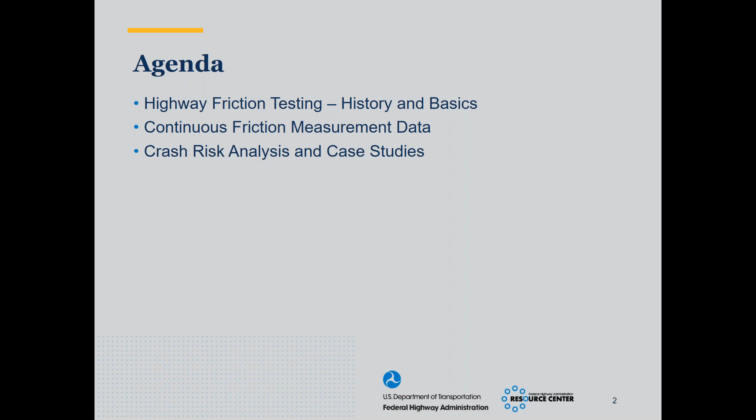So, real quickly on history: if we look at highway engineering research in the U.S., the time it was done at a major, highly coordinated level across all areas—geometric, safety, pavements—was back in the 50s and 60s. Those were the days we were preparing for the interstate era, and a lot of work was needed. Folks recognized we were creating a high-speed roadway environment we hadn't had before, and there was great concern about adequate safety on those roadways. So there was a pretty major effort in fundamental friction research back then.

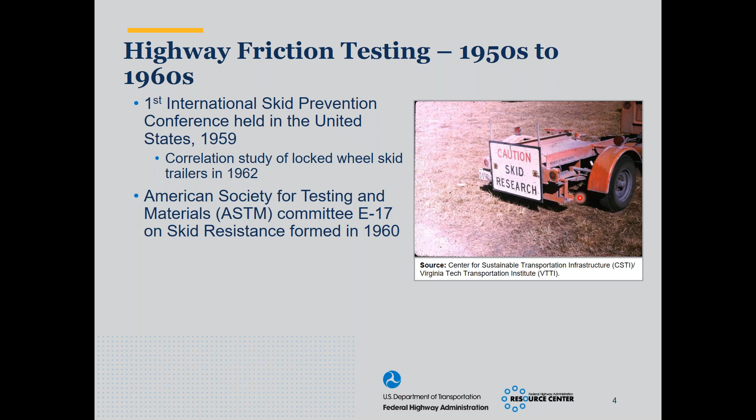The first studies were in 1959 and '62. In the photo you can see a trailer-mounted device called a locked wheel skid trailer, developed back in that time frame. Today, that remains the standard within the United States for highways.

Water is applied immediately in front of a tire, the tire is locked up and skidded, and data is collected at a standard speed of 40 miles an hour, over 59 feet. It's a really good, repeatable field test to measure friction over that 59 feet. But one thing I want to raise is: is that enough data to really inform us from a crash risk analysis standpoint?

Also, the way pavement friction was introduced to the highway community, it really focused on wet weather-related crashes—you can clearly see why folks would think wet weather crashes would be more friction related. That's how we progressed within the United States, with the locked wheel skid trailer and a focus on wet weather crashes.

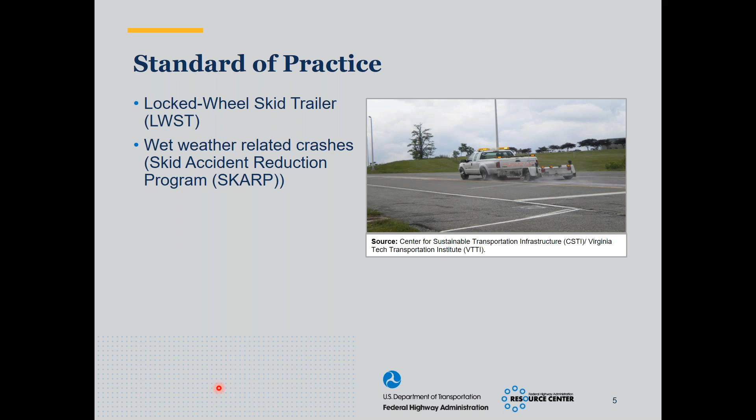So I've already presented very briefly that the locked wheel skid trailer is not a continuous measuring system. Again, if you're taking a test, you lock the wheel, measuring 59 feet at 40 miles an hour.

So for you in the safety community, for the past 10 to 15 years, those of us in the pavement community have been recognizing that pavement surface structure, below and above the surface, changes every foot you go down the road. So there's been a consistent theme within the pavement field measurement community to really understand that and try to measure the pavement condition every foot as you go down the roadway. What I've listed here are several different pavement conditions and the different technologies.

We're using ground penetrating radar, traffic speed deflectometer, which is a measure of the structural strength of the pavement, segregation, ride quality - most of you have heard the International Roughness Index. So again, we're measuring every foot of the pavement to give us an idea of the riding quality. And we're doing the same things, looking at cracking and rutting.

So what I'm presenting is really nothing different than what we've been doing in the past 15 years, just looking at, hey, let's take a look at friction and see what we can do to measure every foot of it, and then see potentially what is the value of that.

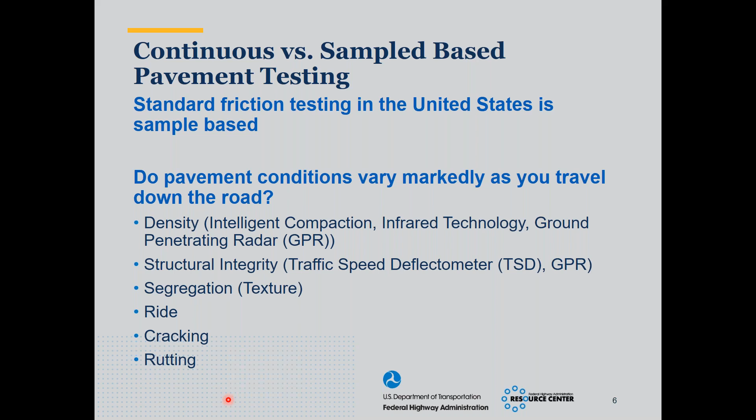So we started a federal highway pavement friction management study several years ago, and we had 4 states, of which Florida was one of them. This was really more of a demonstration project. We have a continuous friction measuring system that has been used overseas for a couple decades. It's their standard practice for highways, and we were looking at what this possibly could do for us in the U.S. But we also recognize, again, friction is not going to be the driver in many situations.

There's so many other roadway characteristics that really play into this, and you guys in safety know that better than any of us - your roadway geometrics, shoulder width, they all play. Horizontal curvature, vertical curvature, cross slope, play key roles in that. So we want to bring all that data together and just add friction to that. That's what the concept of this project was, to bring all those pieces of data together and see if we could enhance our crash risk analysis.

One thing that we've talked about are friction demand categories. What we mean by that is a recognition that every section of roadway in Florida, everywhere in the U.S., has a different friction demand. So if you think about it, if you're in a tight horizontal curve on a 2-lane, 2-way roadway, you need more friction from the pavement to keep the vehicle driving safely and under control than you would on a tangent section. So that's really what friction demand is - the recognition that different sections of roadway, the vehicle needs a different level of friction for that.

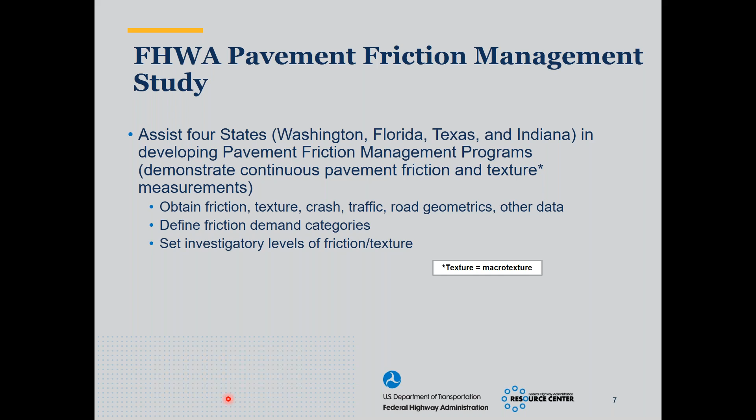And then we have this other area called macrotexture, and you'll see that it is the void between the aggregate. It does several things for us from a friction standpoint, but one of the predominant characteristics is it provides an area for the water to evacuate so that our rubber tires can come in contact with the pavement or with the aggregate and its microtexture. So it is a key element to evacuate water, and it is very key as the speeds of your roadways increase. You want to keep in mind that macrotexture is more critical for high-speed roadways - they're more sensitive to it than lower-speed roadways, because it gives that water a chance to evacuate as the tire is progressing over it.

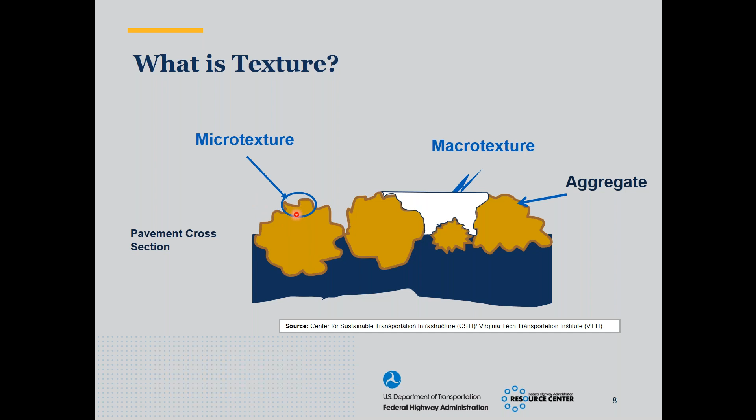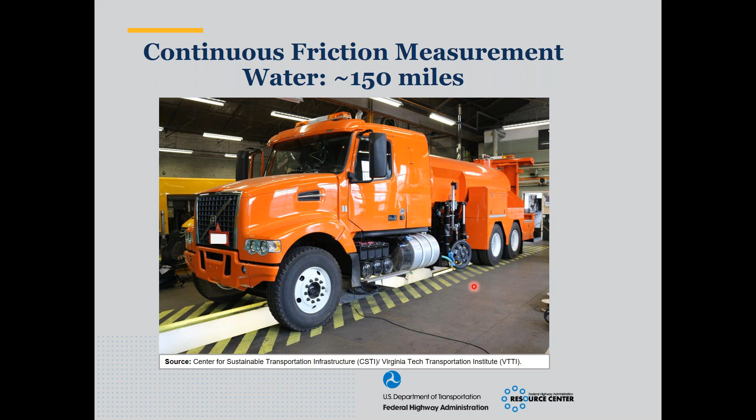There is no non-contact sensor to give us an indication of microtexture yet. But fortunately for macrotexture, the very standard models we use here in the U.S. are a laser-based non-contact sensor, and it gives us an indication of macrotexture. Again, I don't want to give anybody the impression that there is only one way of assessing macrotexture, or that this is the best way to assess macrotexture from a friction standpoint. It is just one way. We have a long ways to go to figure out what is the best, but we're getting insight into it. So those are the two ways we are assessing microtexture and macrotexture.

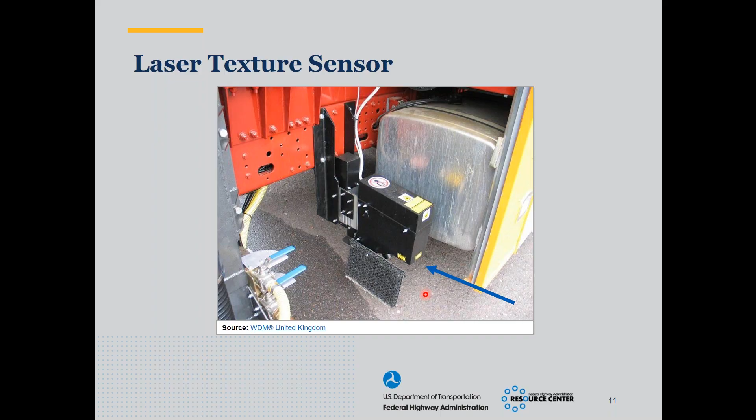Now let's look at it, folding it into crash risk analysis and also the case studies.

Since we're here talking about high friction surface treatments, I want to present information from one of the national leaders in the installation of high friction surface treatments, and that was Kentucky. They were early adopters of it, and they have some of the best data I've seen for the use of high friction surface treatments. So the data I'm showing you here is the crash percent reduction for 138 locations throughout Kentucky where they installed high friction surface treatment. That was the only treatment done out on the roads. They did not do any sign enhancement or pavement markings; it was strictly installation of high friction surface treatment. So it's a pretty good controlled, tested data set to show what a friction enhancement would do.

One thing I'd like to highlight again is Kentucky does not do network level friction testing, so none of these locations were identified by friction testing. They were identified by other more traditional crash risk pieces of data. So if we look at their crash reductions for all 138 locations, a 91% reduction in wet crashes. Kentucky is seeing great value in the use of high friction based on their site selection.

Also, one thing we like to bring forward is that high friction is good for reducing dry crashes too. So it's not just a benefit for wet crashes, we also see a benefit for dry crashes and overall crashes. The data you see here includes 3 years of crash data before installation, and the after-installation data is anywhere between 3 and 6 years, so this is a pretty good data set. As I go around the country talking with folks about high friction and continuous friction measurement, I always ask them how they

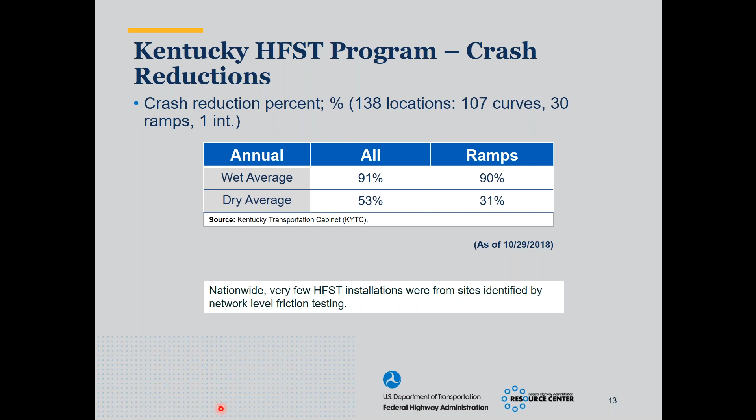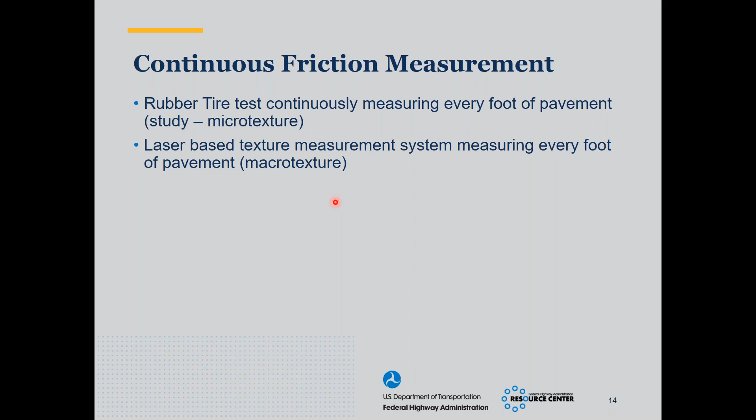I just want to reiterate that from a friction measurement assessment standpoint, we want to be assessing microtexture and macrotexture. Right now, the technology for microtexture requires a rubber tire in contact with the pavement; I'm not aware of any other method to do that. For macrotexture, luckily we have a non-contact sensor to give us an indication. So those are the two pieces we need as we're out there measuring the pavement surface.

All right, I'll go through 4 case studies. One is to show you the potential value of using continuous measurements versus the discrete measurement of the locked wheel. The next will be about macrotexture and its value. Then I'll talk about what we did in Florida last year with the road safety audit. And then I'll show you some data from a high friction surface treatment installation so you get an idea of really how much friction enhancement you get from a high friction surface treatment.

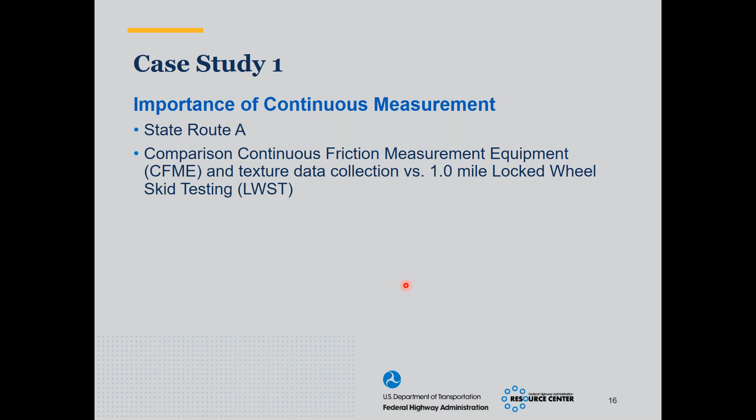Okay, so for the comparison of the continuous measurement versus the locked wheel, one of our states, we asked them to collect data every mile. So every mile point, we said lock up your locked wheel skid trailer and give us data there, and we're going to measure every foot as we go down the road.

So here's a graph that I want you to get familiar with. On the horizontal axis, we have the mile marker, so you can see we're at 54, 55, all the way up to 61. So we have several miles of data. On the left vertical axis, we have the friction test result from 0 to 100.

And the blue line here is the continuous friction measurement. You can see we are continuously measuring, and it does vary as you go down the roadway. Again, the continuous friction measurement here is an indication of microtexture.

The yellow dots are the locked wheel skid trailer, and for this state, they use a rib tire, which is the same system that Florida uses, and it is more of an indicator of microtexture than macrotexture. So let's just look at those yellow dots. You'll see that the first one is right on the 54-mile point, but then the next one is not at 55, it's up around 55.2. So there may have been something right at that mile point that didn't allow them to feel comfortable taking the test. You'll see the other yellow dots, some are actually on the mile marker and some are not. If you think about testing with a trailered system, sometimes there are locations you may not want to test from a practical standpoint, but we're able to measure continuously through all those.

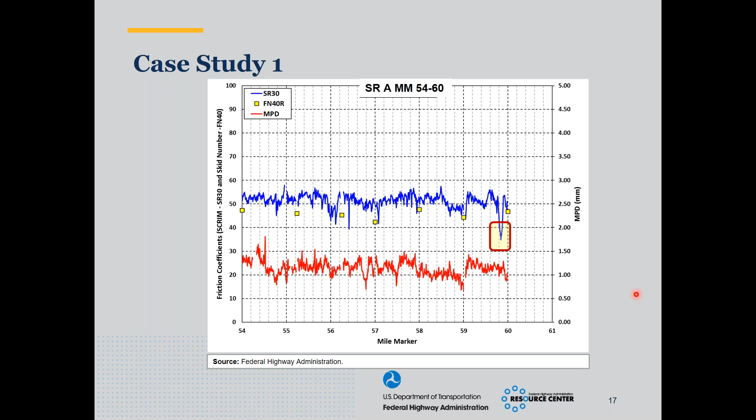All right, let's go ahead and take a look and see what's going on at 59.8. You can see the image here. There's actually a lot going on. We have a vertical curve, a horizontal curve, and an intersection. So from a crash risk standpoint, this is definitely more than what you would have on a tangent section without curvature or intersection. So you need more friction in this location because you have more activities going on. And then what does our friction data show? It shows that we have the least amount of friction in this area at this location.

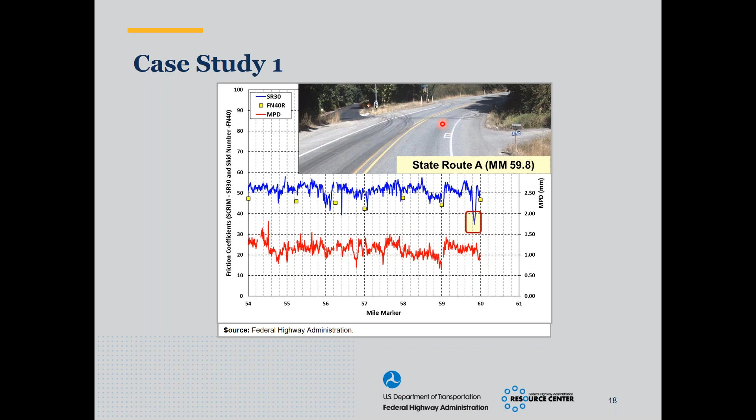From a friction demand standpoint, this is really where you need your highest friction available on your pavement surface. So from a pavement friction assessment standpoint, these locations are ones that you really want to be measuring the friction through, to get an idea if friction is a potential indicator of something going on here.

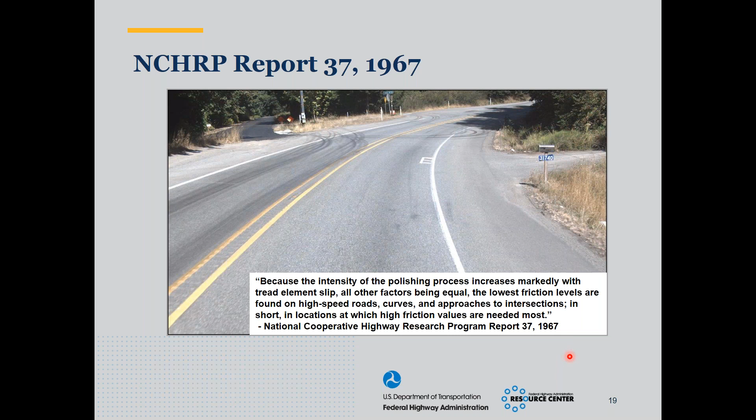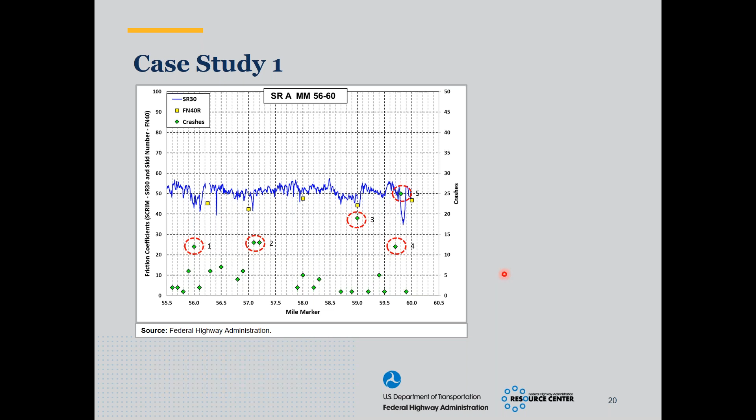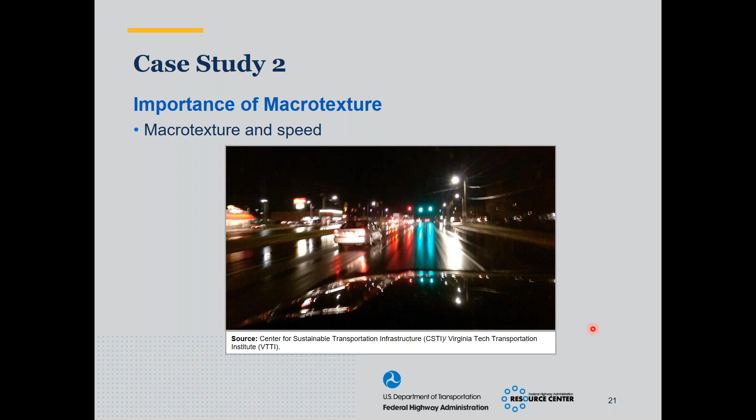Now we're going to go into macro texture and the value for it. Here we have a roadway, you can see at night the pavement looks fairly shiny, a little bit of time after the rain had occurred. So it's just a wet pavement, shiny, rain has stopped, but still the pavement is wet. That's an indication that maybe macro texture has not removed all the water. So why is it important?

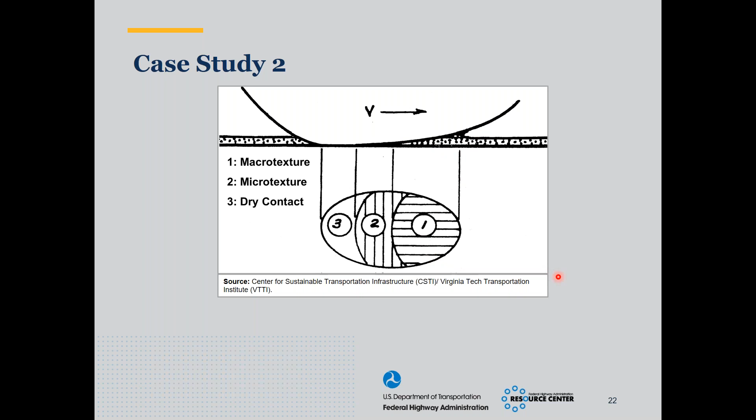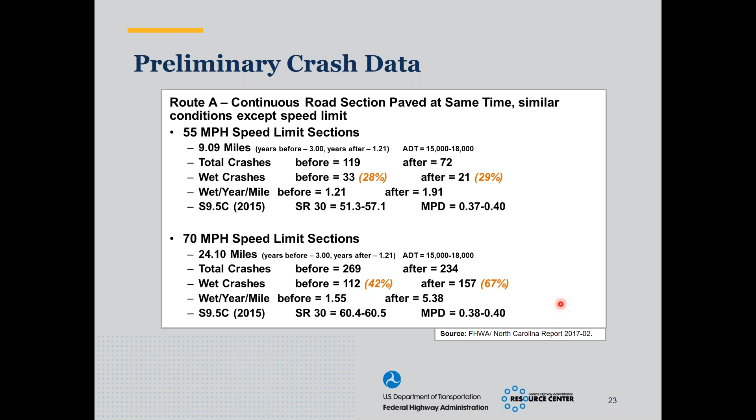So again, it's the same, if not more, from a micro texture standpoint. And if you look at your macro texture, it is essentially the same as the 55. So here's one that we believe the macro texture may be playing a role in the crash risk. Again, the higher speed macro texture is more critical from a crash risk standpoint.

Now we're going to talk about the experience we had in Florida with the conventional road safety audit. Florida has a long history of road safety audits. Tampa District has done many of them.

We did continuous friction measurement in the Federal Highway Project, so we had some continuous friction data in some of their intersections. Florida asked us to come down and include the friction measurement along with the standard road safety audit at several signalized intersections. This was the first time continuous pavement friction data was included in a road safety audit. The only additional thing incorporated was this continuous friction data I showed you, and we did several locations in the Tampa area.

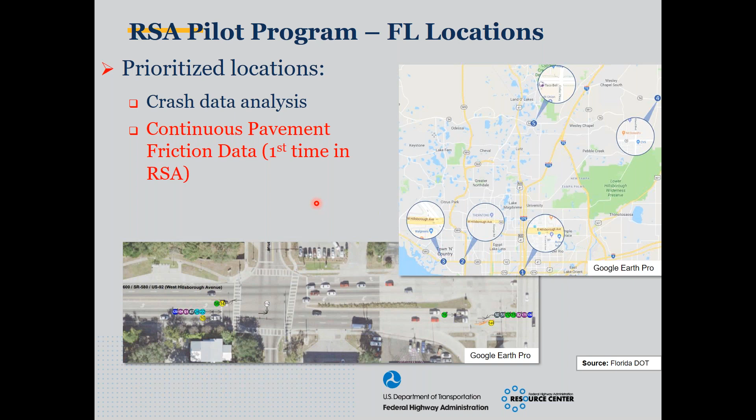All right, so let's look and see what we saw. There's a lot of information here, and this is at one location. Let's look at this top photo. You can see it's an urban area, with signalized intersections that are very close to each other.

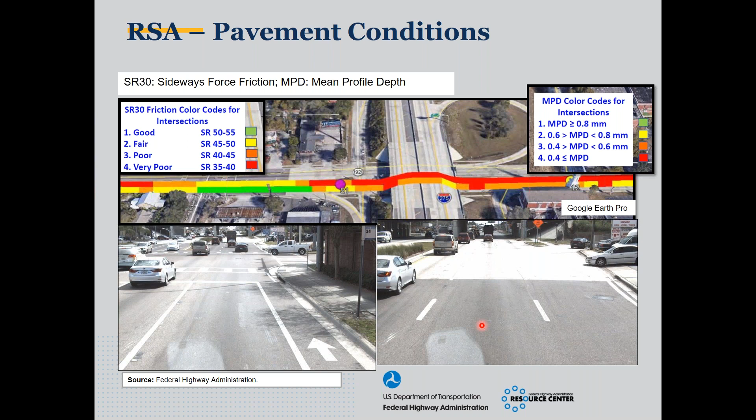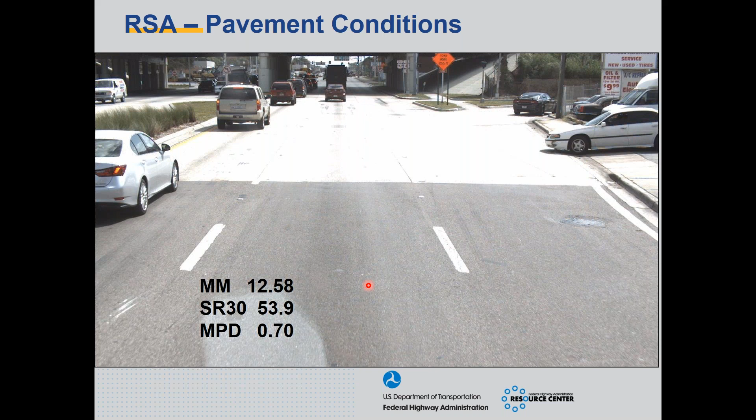Now we're just going to go down to this area here where these cars are, and you can see my pointer. Again, the same pavement surface, same construction, but here's what happens to the friction — it's now down around 54, and the macro texture is 0.7. So we believe this is a good indication of the polishing that occurs from vehicle tires at that intersection.

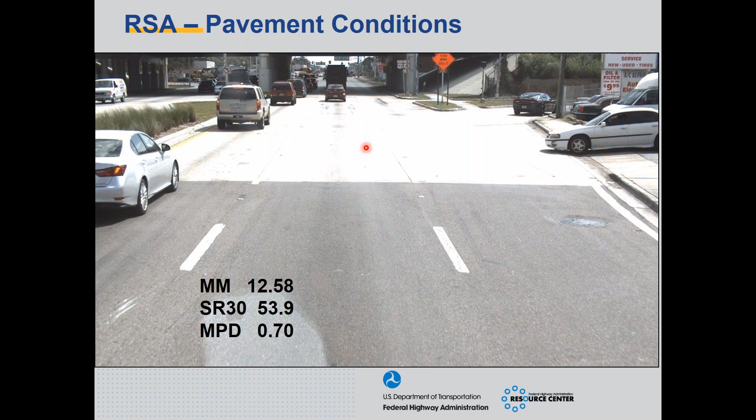Here we don't have that same action, so we have a different friction measurement. Now we're going to go to this next section of pavement, which is concrete. So this is asphalt, and now we're going onto concrete, and we'll see the friction measurement there was at 39, and the macro texture was down to 0.28. This is a good example of an intersection where tire scrubbing has created a differential friction situation as you go through the intersection.

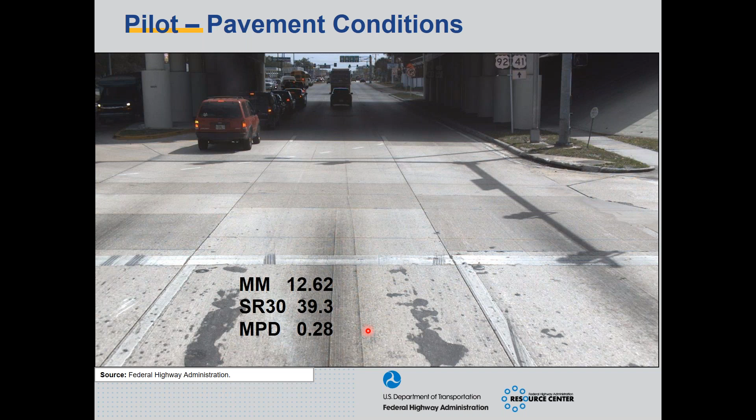For those not familiar with the road safety audit, this was the first time I was ever in one, being a pavement engineer. It was a good mix of interdisciplinary groups, including law enforcement, maintenance, safety, operations, pavements and materials. We had two independent groups so that we hopefully would be reviewing without bias. We looked at the same intersections, the same data, but as two independent groups, then came together afterwards, shared notes, and came to a conclusion.

We were out on the roadway and looked for things you really can't see from your office, in pedestrian crossings, bicycle facilities, how the signs look, whether we have enough sight distance, and what the pavement looks like. So just a very traditional road safety audit, except we added the continuous friction measurement data to the data set.

The group all came to the same recommendation that a high friction surface treatment would hopefully reduce the crashes in these locations. That was really driven by the friction data we had, and also that there were high rear end crash types at these intersections, so the folks felt enhanced friction would hopefully reduce those rear end type crashes.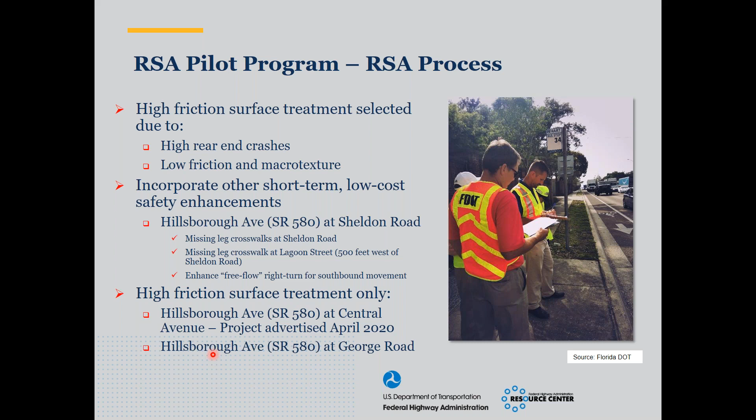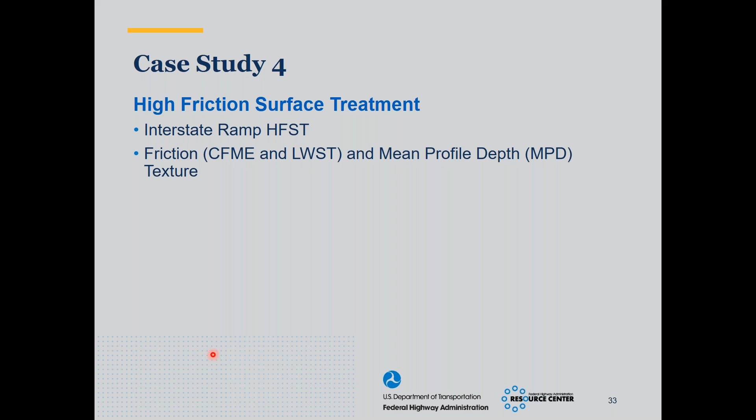Now I'm going to show you some high friction surface treatment data so you have a good idea of how all these numbers play out. You saw various numbers, now I'll show you the high friction and see how it changes.

Hopefully you're familiar with this graph. The blue is the continuous friction measurement, and as soon as we get to the high friction, it shoots from 45 up to about 100, then comes back down and stabilizes around 85. So high friction is a significant increase from a traditional pavement surface. The macro texture is all above 1 for the high friction as well. So high friction surface treatment gives you both extremely good micro texture and good macro texture, the two key characteristics we look at from a pavement engineering standpoint for friction.

The yellow dots are the lockable skid trailer, and you can see it also recognized that significant increase in friction. This gives us good data showing that high friction provides a significant increase over traditional pavement, and the continuous measurement shows you where that change happens very quickly.

One of the things we also believe the continuous measurement can tell you is where you should start and stop your high friction surface treatment installation. For example, if we look right around the 0.55 mile mark to 0.6, we dropped below 40, so maybe it would have been in the best interest to extend the high friction to 0.6. So continuous friction can give you information not only to assess whether friction may be an issue, but also, if you decide to install a friction enhancement treatment, where the limits of that treatment should go.

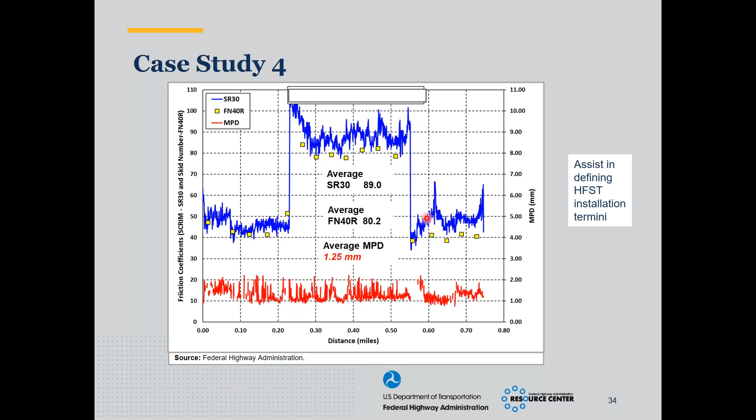Okay, so what are other countries doing? This is a standard investigatory level for friction thresholds from the United Kingdom. They use the same friction measurement system that this data is from. They've been doing it for over 20 years, and over the years they've come up with a breakdown of friction demand categories - A, B, C, Q, all different friction demand categories. For example, motorway is what we would call an interstate roadway on a tangent section. You can see that if the friction is below 0.3, 0.35, that it may be an area of concern. So it's your lowest investigatory level, but your highest speed. But because it's a tangent section, the friction demand is not that great.

Now let's go to C, which is a single carriageway non-event. That would be a two-lane, two-way roadway without an intersection, without horizontal or vertical curvature, just a tangent, two-lane, two-way roadway. You can see that their friction demand is a little bit higher, and that's because it's a two-lane roadway versus an interstate.

Now let's go down to S1, that's a bend radius of less than 500 meters on a dual carriageway. So this would be your four-lane divided highway with a curve of less than 500 meters. You can see their investigatory level for friction is up around 0.45, 0.5. So over the years they've looked at their data, looked at their crashes, and this is their investigatory level. If they have a friction measurement, they average the friction data over 10 meters, and where a friction test result over those 10 meters is less than these numbers, that will institute an investigation at that site.

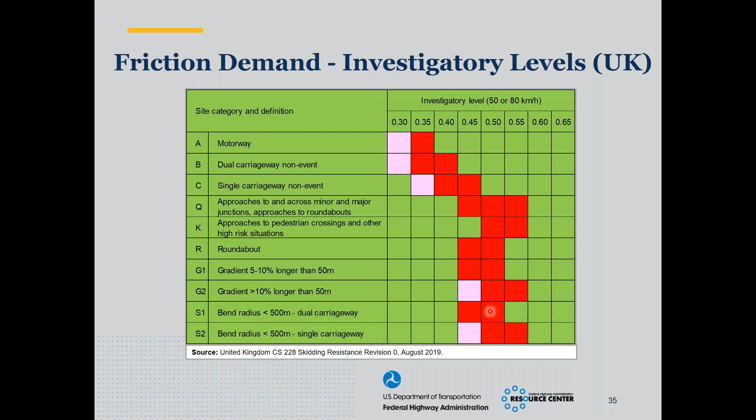Here is a traditional safety performance function that is used within the U.S. from a crash risk analysis. What we believe is that the friction data and texture data can easily be folded into this traditional crash risk analysis model, just like horizontal curvature, vertical curvature, shoulder width, lane width, and all those other roadway variables, to give you an idea of your crash risk. So we believe you can take the continuous friction data and incorporate it into your standard crash risk analysis models as they sit, which should facilitate implementation in that manner.

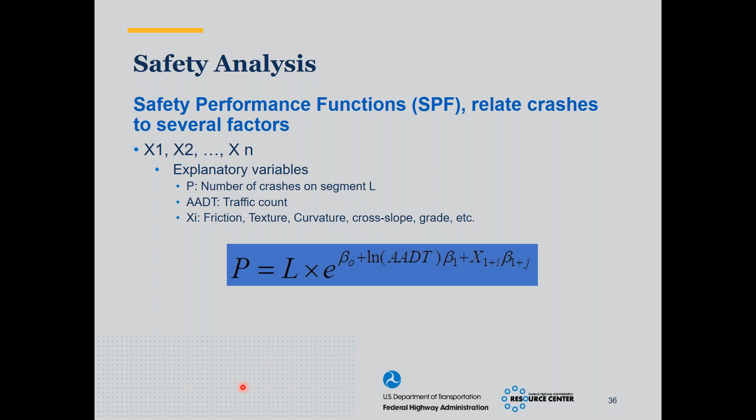So to wrap up my discussion here, back in 1967 the NCHRP Report 37 highlighted the friction demand concept, that where you have the highest friction demand, there's a good chance you have the lowest available friction on the roadway because of all that tire pavement interaction. I want to highlight that just because you have low friction data is not an automatic reason to invest in a treatment. It's just one piece of the puzzle, and it's a very complex puzzle.

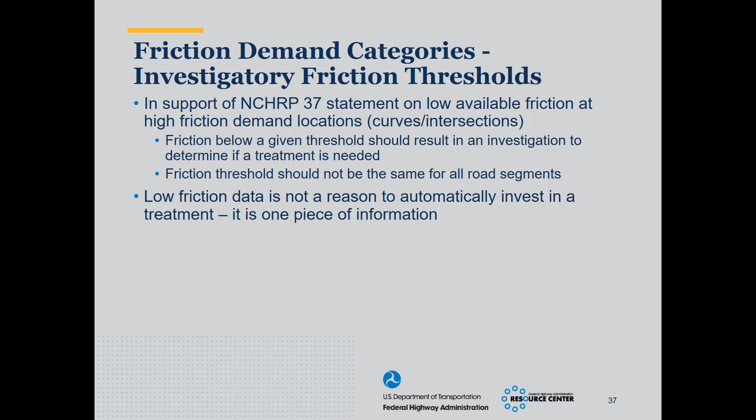I also want to highlight that the lockable skid trailer is a very high quality test for that discrete measurement. The United Kingdom uses the lockable skid trailer for research purposes - they do not use it in their production testing, but they use it for research. It's challenging to take tests at these critical locations, and I think the continuous friction measurement shows that friction does change at certain locations, to where the value of continuous measurement, we believe, should be investigated further.

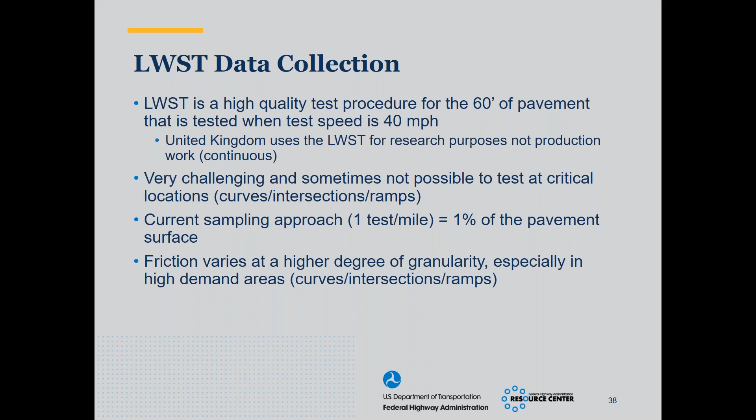I want to highlight that we need to bring together all the roadway information, not just the friction data, but also the roadway geometrics, to really make a more informed decision. The great benefits that many states have seen from high friction surface treatment installations to date leads us to believe that there are certain locations where a friction enhancement would reduce crash risk. So with that, that's all that I have right now. Thank you.

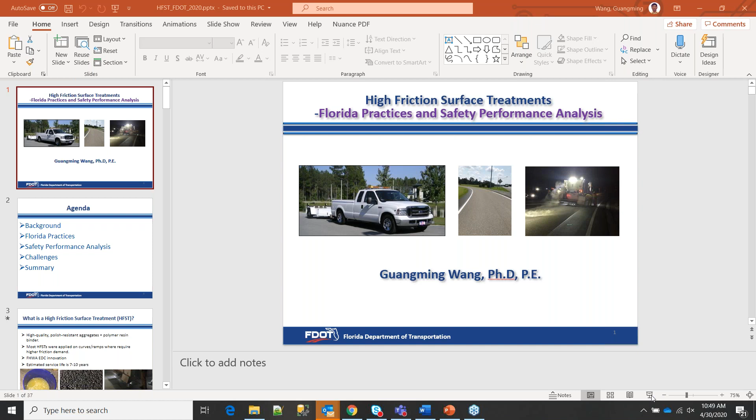Hello, everyone. Can you hear me? I can hear you, Guangming. Okay, thank you. Can you see my screen? Once you click the slideshow, we will see full screen. Okay.

Good morning, everyone. It is my pleasure to share Florida's high friction surface treatment experience and program here. My name is Guangming Wang, and I work at the State Material Office as a pavement performance evaluation engineer. I work with Charles Holzschuher and monitor the statewide high friction surface treatment program. So the topic of today's presentation is high friction surface treatment, Florida practice, and the safety performance analysis. Here's the agenda.

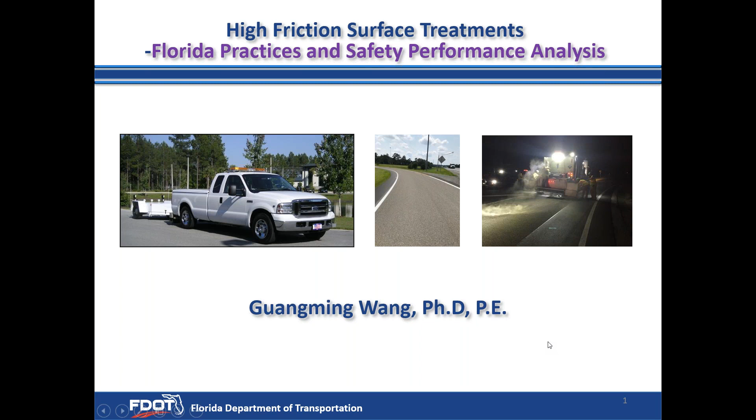First, I will introduce some background on friction surface treatment. Then I will talk about the Florida friction surface treatment practice, including the program. After that, the safety performance analysis will be presented, followed by 2 case studies. Finally, I will cover some potential challenges we are facing with friction surface treatment in practice today, with some recommendations to conclude today's presentation.

So what is friction surface treatment? It is a thin overlay of high-quality, polish-resistant aggregate bonded to the pavement surface with polymer resin binder. It is a site-specific application to restore and enhance pavement surface friction.

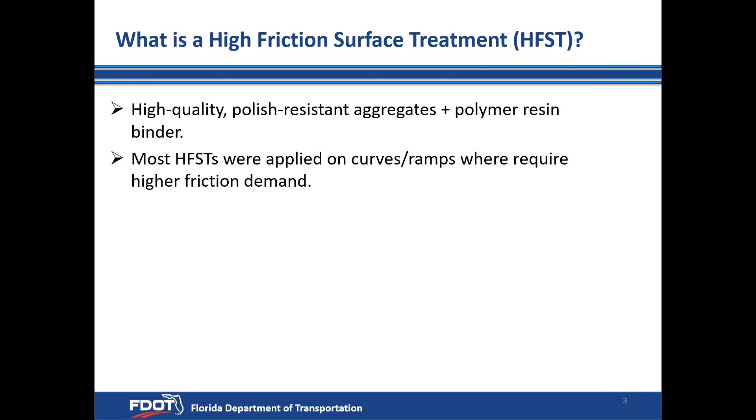Most friction surface treatments were implemented on curves or ramps where high friction is demanded. It is one of FHWA's Every Day Counts innovations and has been promoted by FHWA aggressively, demonstrating success in reducing crashes, injuries, and fatalities associated with pavement friction issues. The estimated service life is about 7 to 10 years.

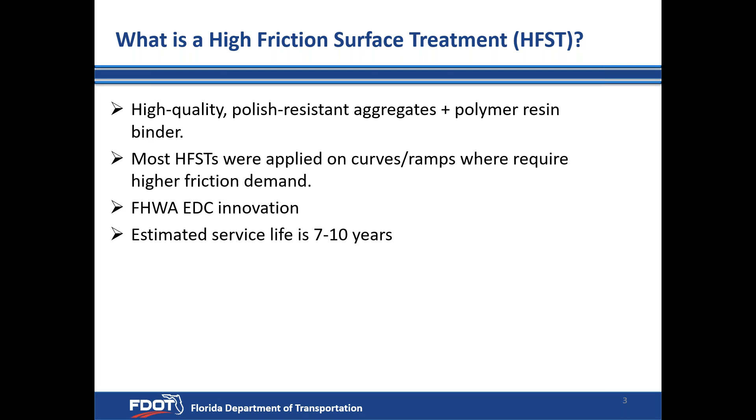Here shows some pictures and a short video of on-site friction surface treatment application.

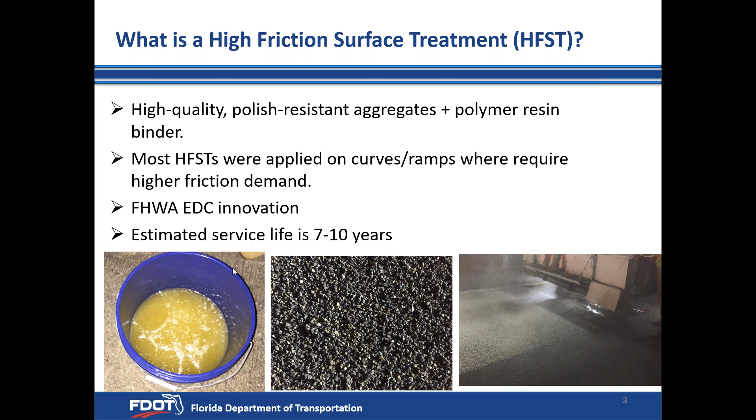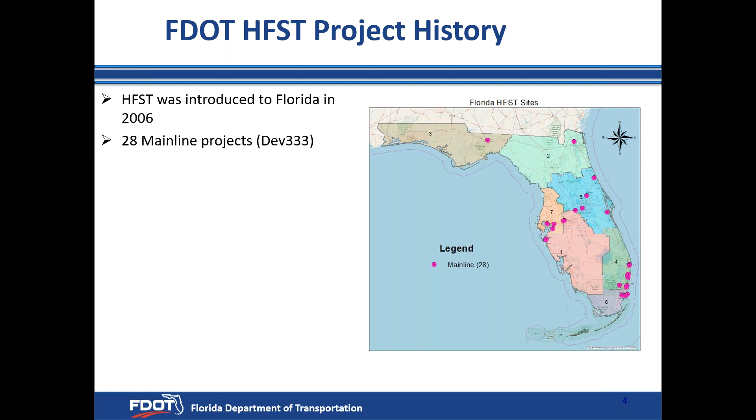Friction surface treatment was first introduced in Florida in 2006. Up to 2019, we have 28 mainline projects in total. Here shows the map of statewide distribution of friction surface treatment projects. As you can see, each district has at least one friction surface treatment project.

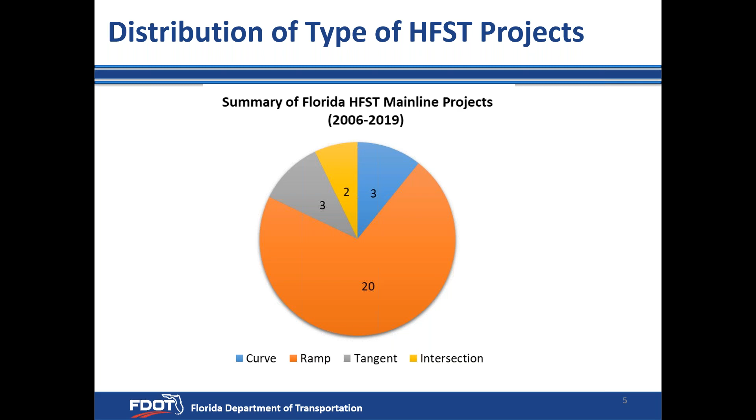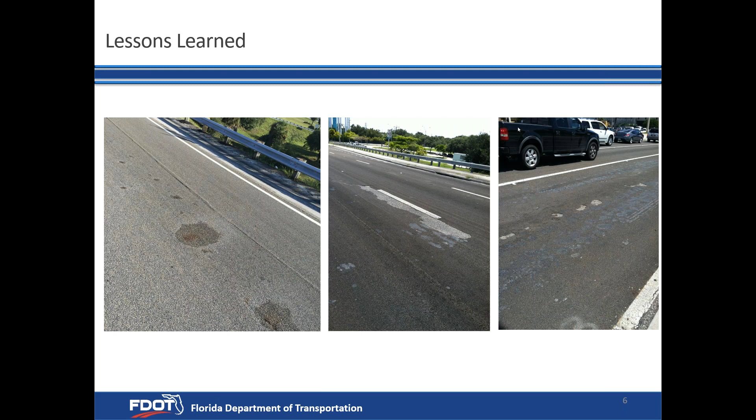During the early age of friction surface treatment implementations, we had some premature failures, such as bleeding, aggregate loss, and delamination. To address those premature failures, FDOT carried out research with TTI and developed friction surface treatment guidelines, also updating the specification.

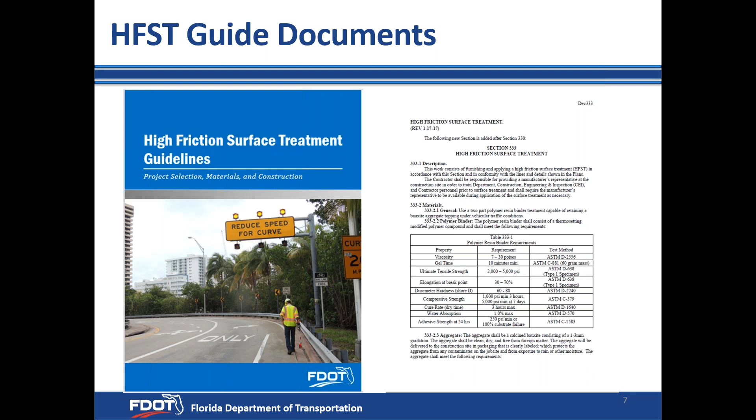So we specify material requirements, the existing pavement condition to be overlaid, and application method.

For instance, manual application is not applicable. It's no longer acceptable for projects over 200 square yards. Instead, automatic application is required to enhance the consistency.

Now let's talk about the Florida friction surface treatment program.

We developed the friction surface treatment SharePoint website. The customer can submit the friction surface treatment request online, and the SMO will get a notice immediately. Depending on the conditions, we request the customer to submit one or more of the following documents on SharePoint for preliminary assessment: safety study with crash diagram, cost-benefit analysis, friction report, cross slope with drainage analysis report, and pavement condition report.

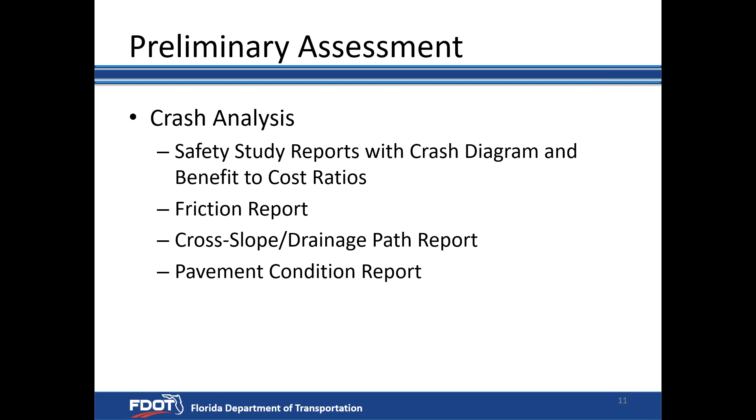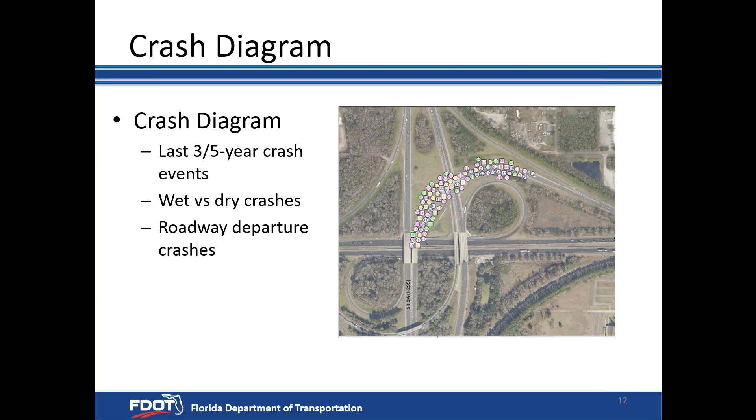The crash diagram shows including the last 3 and 5-year crash events, with statistics on wet crashes, dry crashes, and roadway departure crashes. The cost-benefit analysis shall be performed to make sure the benefit-cost ratio is greater than 1.5 at the minimum.

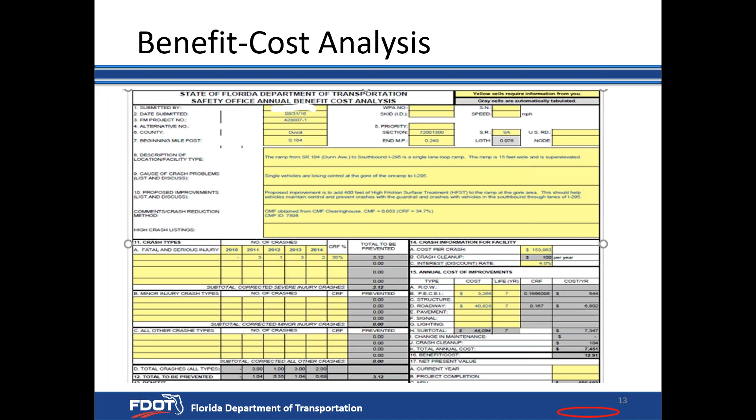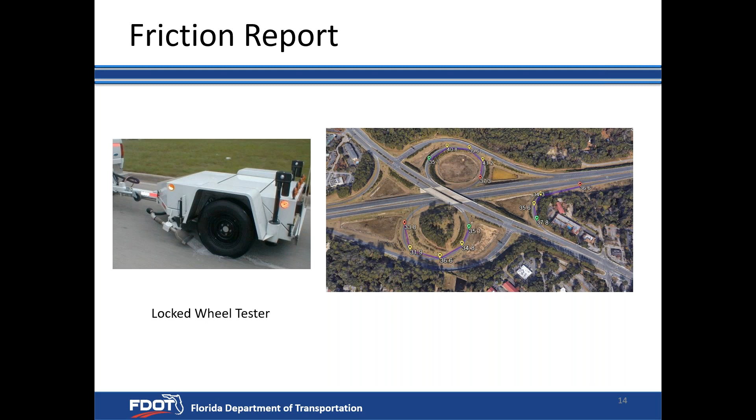Sometimes we also request a friction report to check whether the friction is greater than 35 or not. If necessary, we also require cross-slope and grade measurement and perform drainage analysis to make sure drainage is not the major issue for the crashes.

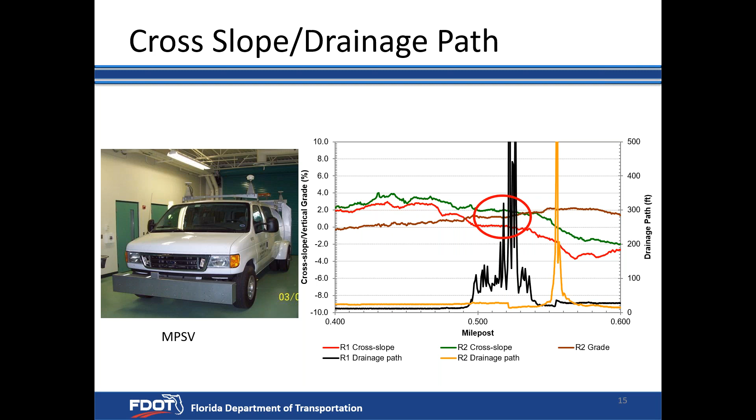If the friction surface treatment is overlaid on the existing pavement, we request a pavement condition report to make sure the existing pavement is either dense grade or concrete pavement, the PCS rating is good or above, there's no structural damage, and the overall cracking percentage should be less than 6%.

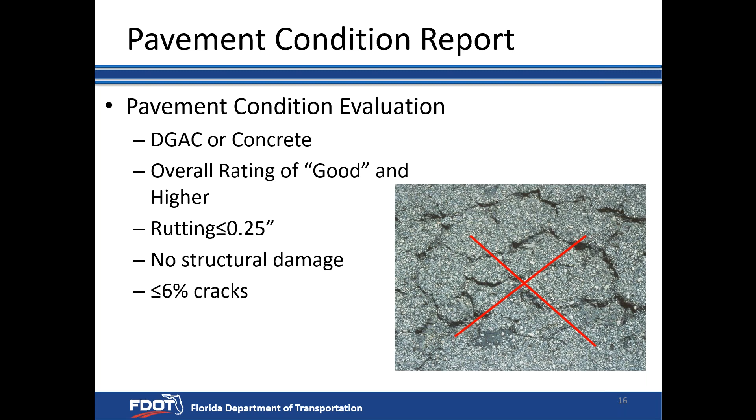Based on submitted documents, SMO will hold a teleconference with customers to discuss friction surface treatment candidates, application conditions, and limits, the conceptual plan, and help the agency make the final decision. Here shows an example of proposed application limits.

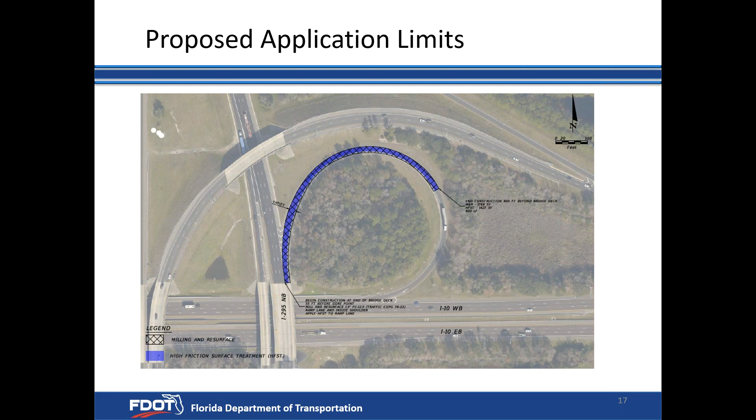We also developed a statewide friction surface treatment tracking system to track performance. This system includes the project locations, material information, and friction surface vendor information. The system is also linked to the GIS map, which allows the user to visualize locations online.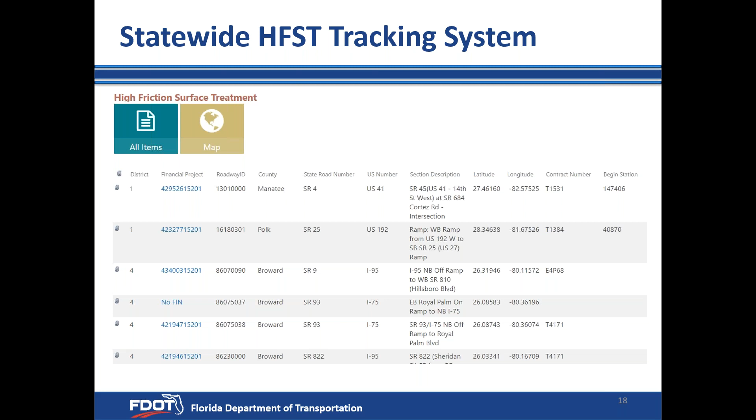We also developed a database for friction and texture, so that we can compare friction and texture of friction surface treatment with traditional pavement. As shown in this figure, the friction of friction surface treatment, represented by the green square, is about 50% to 100% greater than traditional pavement.

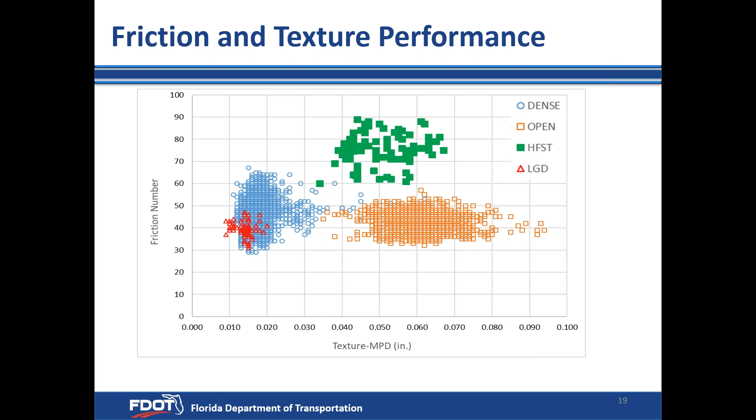Eventually, we want to know what is the crash performance of high friction surface treatment. So we did safety performance analysis. The challenge here is how to check the crash performance of each high friction surface treatment site dynamically.

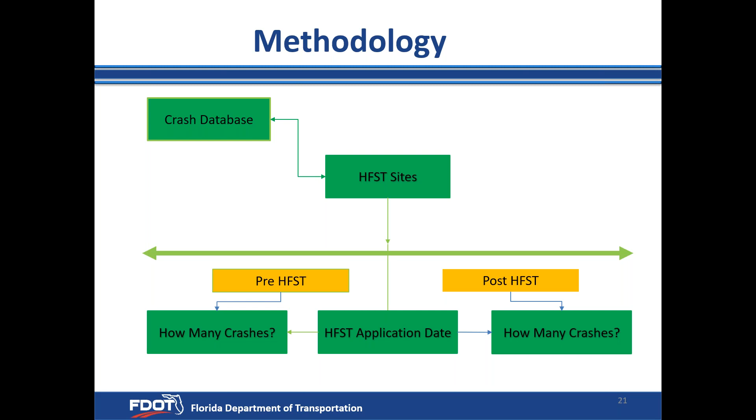So we came up with a methodology. We link the Florida crash database with high friction surface treatment sites and compare the number of crashes before and after treatment. Based on this methodology, we developed an access tool which allows users to define a time period, say 3 years or 5 years.

It should be noted, some projects may not have 3 or 5 years of crash history after treatment. For example, a project built in 2018 only has 2 years of crash data. In this case, it has to be normalized to 5 years. We also don't consider new projects less than 1 year old, because we think that's not enough time after treatment to illustrate the crash performance.

Here are the results of the 5-year mainline high friction surface treatment crash performance. For all mainline high friction surface treatment projects, including ramps, tangent approaches, and intersections, the overall crash reduction was 43%.

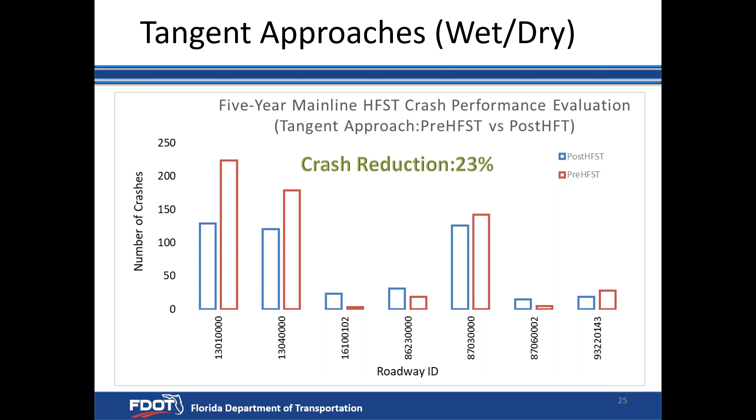For the curved ramps only, the crash reduction is even bigger, 69% under all conditions. Now for the tangent approach, including the intersections, the crash reduction is 23% under all conditions. But under wet conditions only, the overall reduction is 77% for all high friction surface treatment projects.

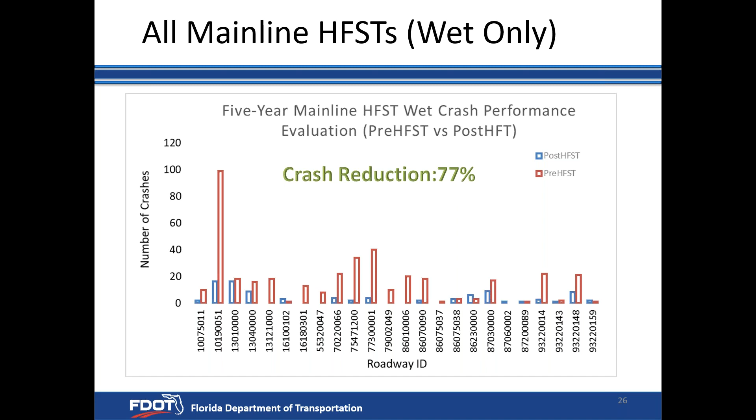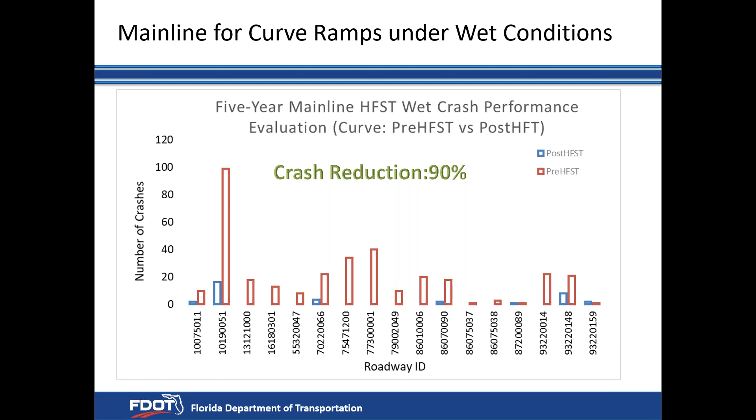For the curve ramps under wet conditions, the overall crash reduction is 90%. So it's pretty significant. Also, for the tangent approach under wet conditions, the crash reduction is 55%.

To sum it up, here's a summary. For curved sections, the overall crash reduction is 69% under all conditions and 90% under wet conditions only. For tangent sections, the crash reduction is not as significant as curved sections, but still we get 23% crash reduction under all conditions and 55% under wet conditions only.

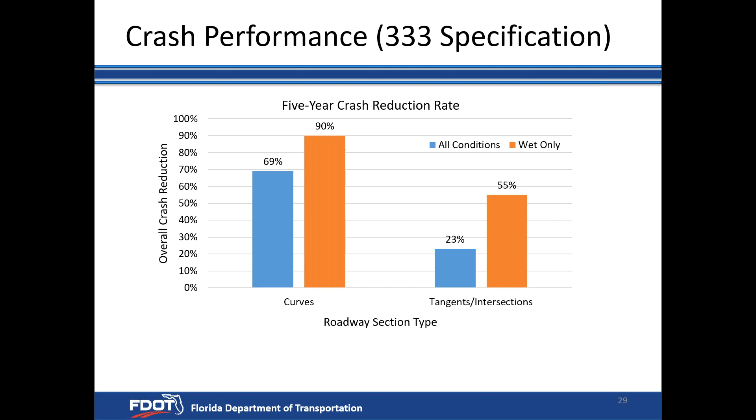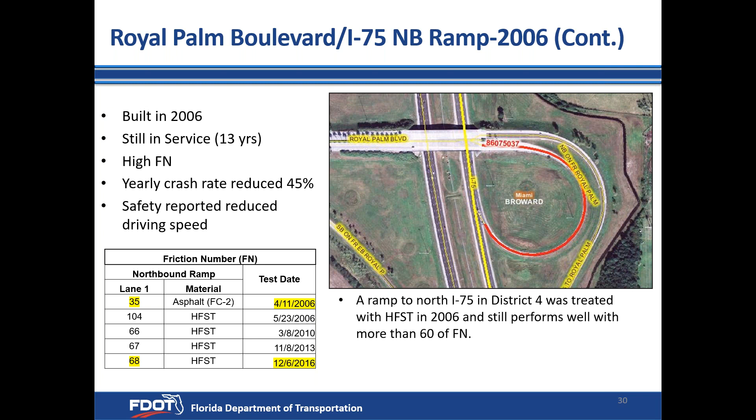I would also like to share two cases here. One is the Royal Palm Boulevard to I-75 northbound ramp. This project was built in 2006 and is still in service, still performing very well with a friction number more than 60. Overall, the yearly crash reduction is 45%.

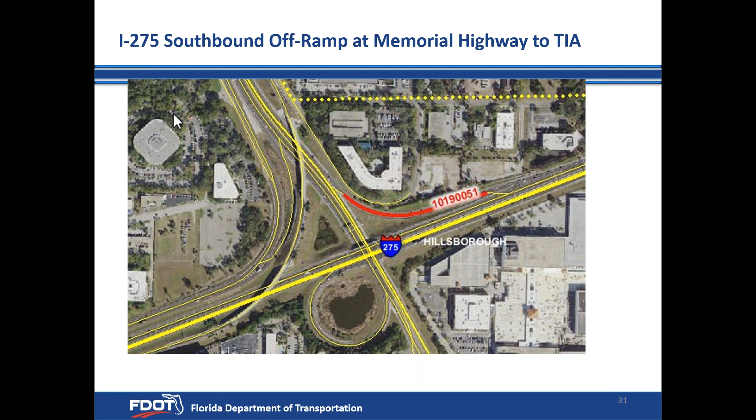Another project is I-275 southbound off ramp at the Memorial Highway to the Tampa International Airport. The district office and safety office did a crash analysis. It turns out the overall yearly crash reduction is 69%, and 93% under wet conditions, which is pretty close to our state materials office crash performance analysis.

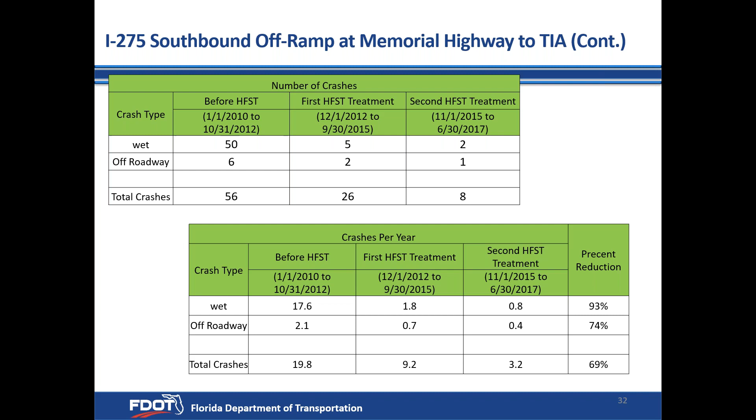Although high friction surface treatment has some significant safety benefits, we do have some challenges during implementation. One of the challenges is high cost. The average unit cost for high friction surface treatment is about $46 per square yard, which is almost 10 times more than thin overlay. It is also more expensive than the national average, which is about $30 per square yard.

Florida, in this case, is kind of unique. The high friction surface treatment was built as a subcontractor to the prime contractor, which may lead to higher bidding cost. In the future, we may separate high friction surface treatment and asphalt paving, and bundle high friction surface treatment projects together for bidding, which may reduce the total cost. Another solution would be developing asphalt mixture with calcined bauxite as an alternative to high friction surface treatment, to popularize its application.

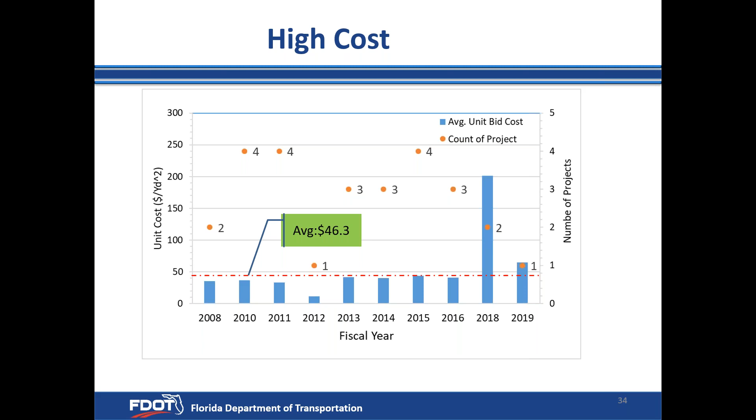Another challenge is the maintenance and rehabilitation strategy. With more and more high friction surface treatment projects approaching the end of service life, what are the maintenance and rehabilitation strategies? Milling or micro-milling, those types of questions need to be answered in the future. Fortunately, we have some research projects to address challenges like this.

To sum up, high friction surface treatment is a great safety treatment, and it is most cost effective on tight curves. Although there are some challenges, we strongly recommend implementing high friction surface treatment on locations where you demand high friction, and in particular on those locations with high frequency of crashes.

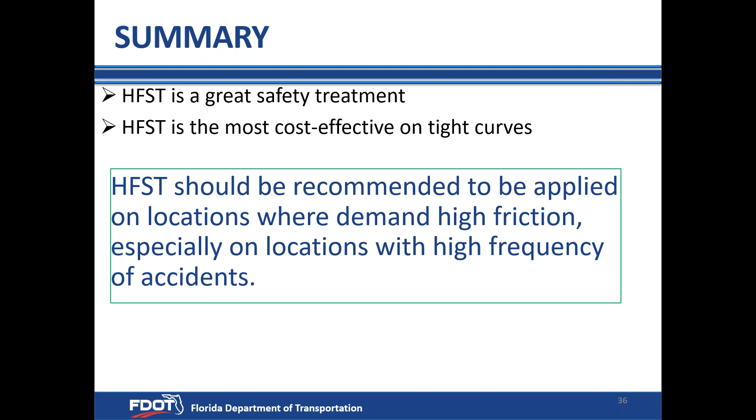With that, I will conclude today's presentation, and I open it up to your questions. Thank you.

Thank you, Dr. Wang. That's a great slide to leave it on there. Thank you.

We've got a couple of notes that have come in. Kudos to both presenters, there's been good comments about great information. Thank you so much for the information.